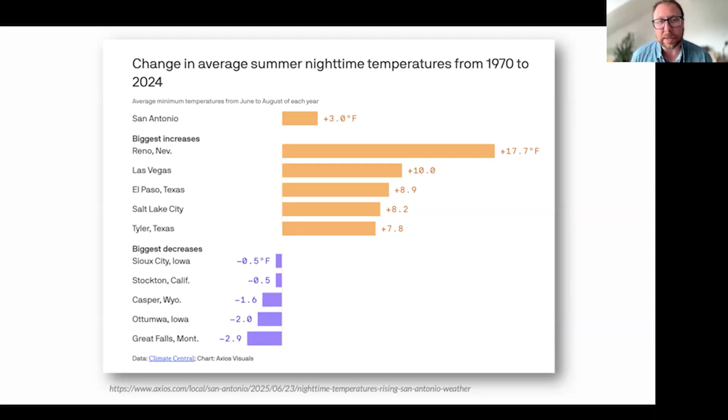We know that right now in much of the US, people are suffering under a heat dome. And we know that we as Passive House designers are charged with designing not only the most energy efficient buildings, but also buildings that are, for lack of a better term, resilient against these types of effects, these types of problems or challenges.

Now, for those of you working in the Passive House world, you know that Passive House prioritizes a small set of things. Passive House as a framework is much more focused, much more targeted than some of the more totalizing green building standards out there that might touch on water, energy, embodied materials and material toxicity. Passive House is much more focused—on operational energy performance, peak loads, and what we call thermal comfort.

And thermal comfort—we'll get into it in this talk. It's an interesting topic, so I could talk about it all day long. It might be boring for some folks, but I find it quite interesting: the experience of people in our buildings, and to my mind, quite important.

In the Passive House world, at least on the PHI side, the main way we quantify and evaluate summertime thermal comfort—talking about the difference between winter and summer—is by measuring what we call the frequency of overheating and the frequency of excessively high humidity. These are metrics we use to evaluate the building and ask, are we predicting that it's going to perform badly on these rough metrics?

Now, there's nothing wrong with these metrics per se. These are excellent high-level, first-order assessment metrics. If you're failing these, you can be pretty confident you're going to have a problem with your building. But what I want to argue is that these metrics are—maybe never were, but I think are no longer—sufficient and adequate for the types of buildings we're building.

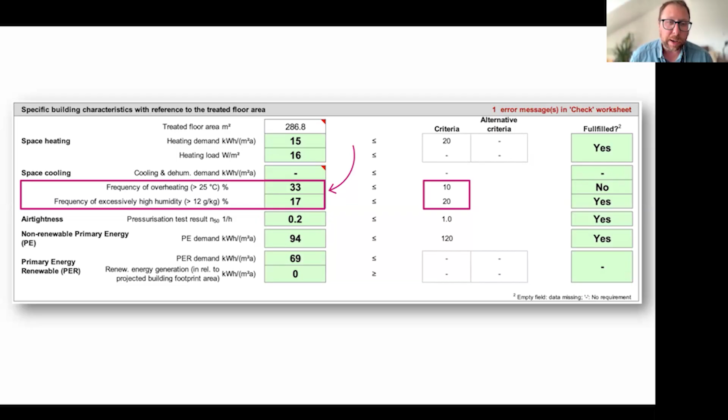So what I'm going to argue is that we need to supplement, not eliminate, but supplement—add some new types of modeling and assessment to these existing tools that we're already familiar with working as Passive House practitioners.

So my opinion, and this is just my opinion, feel free to disagree and argue with me—my opinion, after building umpteen bazillion Passive House models over 15 years now, is that the Passive House modeling tools don't push us, don't incentivize us as designers to be careful enough when it comes to overheating risk. Again, that's my opinion.

I believe we need to supplement—again, not replace, not eliminate, not get rid of—but supplement these existing Passive House modeling tools with other tools so that we can effectively design out the types of overheating risk that we are seeing in some Passive House projects.

And not to put too fine a point on it, but lest you think I'm making this up, we do hear regularly from many other practitioners, and many of our own early clients, that overheating in the Passive House buildings we design is and has been a problem. As a result of some of those early—I might even call them failures—back in 2009, we were designing buildings where we didn't quite understand all the nuances of this, and we definitely designed some buildings that overheated.

Those early failures have caused us to become much more conservative and much more careful when it comes to overheating risk. And I want to argue that you should be careful as well.

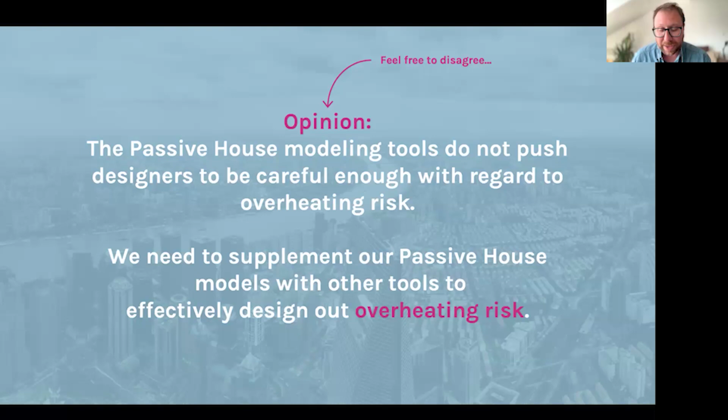So how do we do that? How will we do that? And what do I think we need to supplement? What do I think is missing from the existing passive house models that I think we should see in the newer generation of modeling tools that I'm recommending we add?

Well, the main culprits, the main issues present in the existing modeling tools that lead us to, I don't want to use the words right and wrong, but unhelpful results: number one, our passive house models are single zone. Especially when you get into really large buildings, buildings with heterogeneous use types, really tall buildings that are highly stratified and spread out.

These types of single zone models are just not adequate for capturing the localized overheating that happens in highly glazed rooms, north versus south side rooms, et cetera. So the single zone nature of our models is fundamentally a problem that we need to wrestle with.

I think also that while the monthly time step of the passive house models is perfectly adequate for energy performance assessment, and it's fast and easy-ish to execute for design phase assessments, and great for certification, that monthly time step is not quite adequate to capture the nuance of localized overheating events.

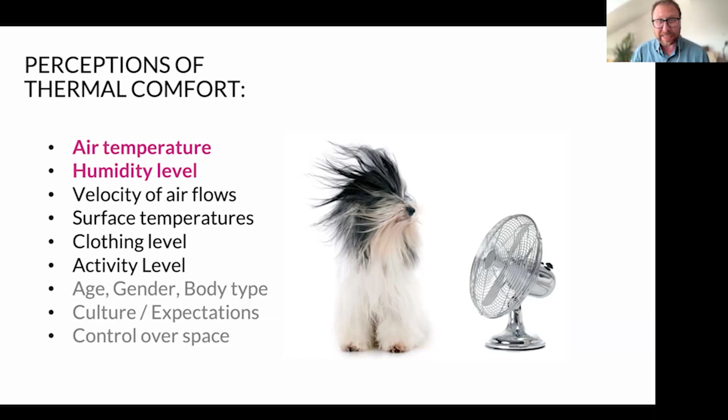So again, what we're talking about here is your and my perception, our feeling. But again, because we're engineers, we want to turn that feeling into a number.

So how do we do that? How do we turn your feelings into numbers that we can measure and optimize for?

There are two basic standards you want to refer to if you're interested in this type of modeling as a starting point. I'll talk about some other interesting new work coming out, but the two core fundamental documents you want in your library are the ISO 7730 and the ASHRAE standard 55. These are like mirror documents, basically saying the same thing, except one is in ASHRAE language and one is in ISO language. They outline the same procedures for evaluating, measuring, and quantifying the subjective thermal comfort experience of a human being within a space.

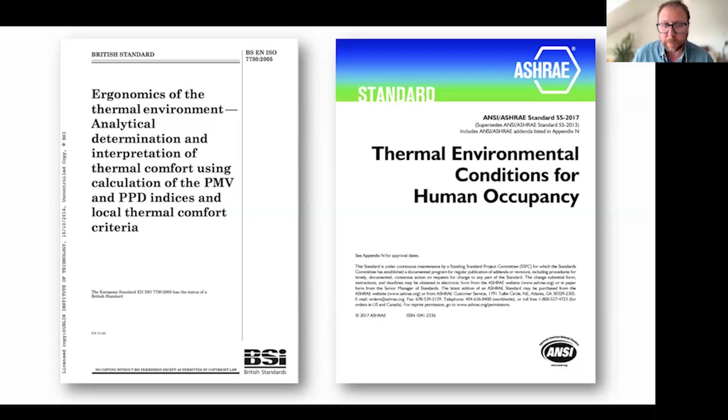Specifically, they outline a calculation methodology for determining what's termed in these documents the predicted mean vote, or PMV. This is a useful vocabulary term in thermal comfort modeling—again, a way of taking your and my feelings and expressing them as a series of numbers.

The way this index works is that the value 0 represents perfectly neutral, like one of those chambers people go into where everything is the same temperature and you have no feelings—I don't know what the term for those is. Negative values represent cold experiences, and positive values represent hot or warm experiences.

This PMV calculation takes into account most of the things we were just talking about: air temperature, relative humidity, airspeed, metabolic rate—that is your activity level—your clothing level, and your mean radiant temperature.

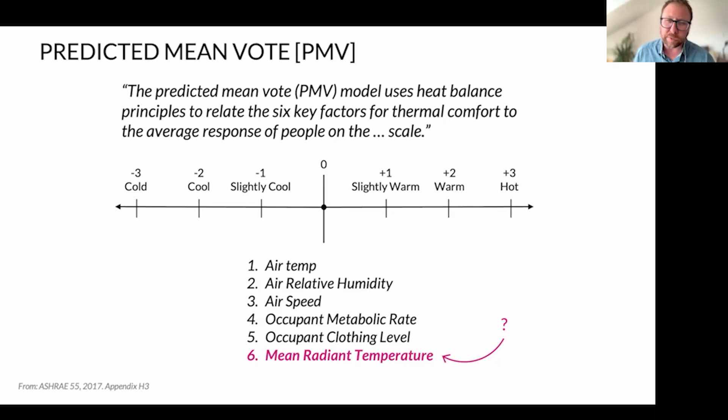Mean radiant temperature—that's a weird term. You'd be forgiven if you haven't heard it before. What is the mean radiant temperature, the temperature experience of the person within the space?

If you were to look around with infrared goggles, like those Predator goggles from the movie, and could see into the infrared spectrum, you'd see that every solid object around you—the floor, the wall, the chair, the window, the roof—is emitting infrared radiation.

The amount of infrared radiation emitted by these solid objects varies depending on the temperature, the heat content of that object. The hotter the object, the more infrared radiation is emitted.

Our bodies experience this radiation, though we can't see it—our eyeballs can't see into the infrared spectrum. We have sensors and cameras that can, but not our eyes. Still, our bodies experience that radiation within a space. So whether the surfaces around our bodies are warm or cold is one of the important factors driving our experience of thermal comfort.

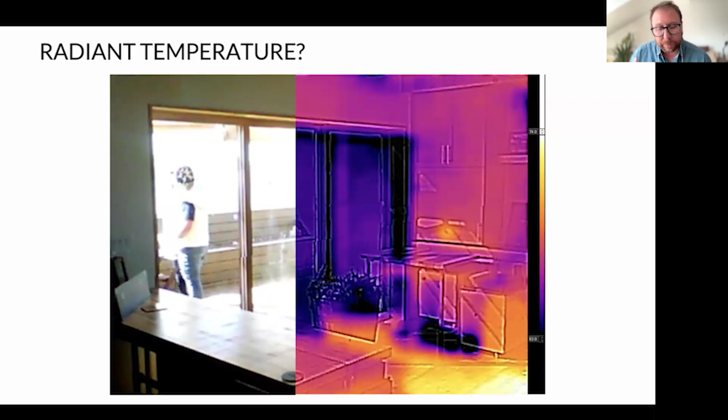This is one of the main evaluative criteria for providing thermal comfort in passive houses during winter. Historically, this has been a main focus area within the passive house community and framework—this radiant temperature asymmetry, particularly with regard to cold windows and very large cold glazing surfaces. A lot of the early research from the early 2000s coming out of Darmstadt focused on this problem of radiant temperature asymmetry.

So it's not only that the surfaces around your body are cool, but that they're cool on one side of your body and warm on another—or cool on one side of the space and warm on another. This asymmetry leads to negative perceptual effects, not only directly on the human being, but also because of the inevitable temperature stratification within the space. You can get cold air puddling, a cold toes effect, and other negative perceptual effects when you have this type of asymmetry.

Historically, one of the ways that the passive house standard has said we combat this passively is by using badass windows. If we use badass windows, that increases the temperature on the interior face of the window, therefore mitigating or reducing the asymmetry, the difference in temperature from one side of the body to the other. That can help improve thermal comfort within buildings and decreases temperature stratification. So that's an excellent thermal comfort improvement we can implement for the wintertime.

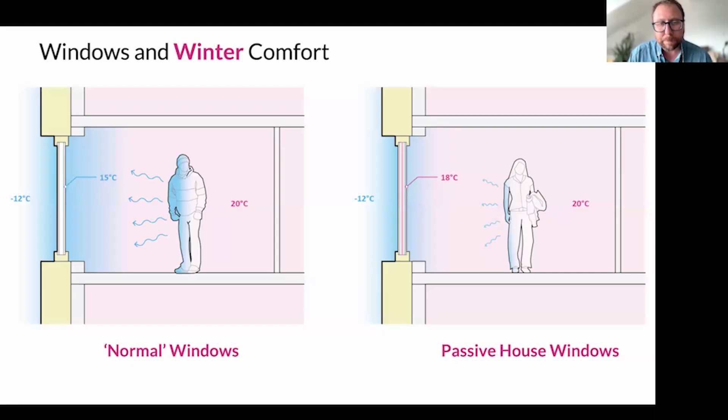Many years ago, we were looking at this and thinking, that's great, that's really useful. But then we were presented with a series of cases, conditions, whatever word you want to use, that didn't quite match the scenario I just described. What I described kind of makes sense if you're in, say, a hotel with a big glass wall, but you've only got one wall and the rest of the space is kind of opaque.

But what happens if you actually have glass around a corner? What happens if you have glass on two sides of your body? What happens if you have really tall glazing? We were working on projects that presented these interesting, and I don't want to call them non-standard, but let's say from a Passive House perspective, non-standard conditions. We were looking for different ways to assess and model the thermal comfort impacts of these kinds of unique or non-standard conditions.

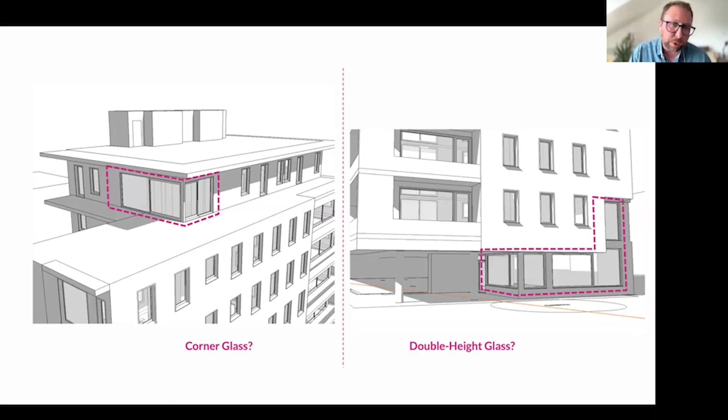We felt like that basic Passive House technique of just reducing straight asymmetry wasn't quite sufficient for capturing the nuance of the actual buildings we were building. So again, this is, I don't know, 5 or 6 years ago, 7 years ago.

What we settled on at the time, one of our early attempts to add nuance to our modeling, was to say, okay, what if we used some of these new computer systems and software tools available, which can harness the power of modern computers to calculate really, really fast. One of the things the Passive House folks working in 2001 didn't have was an amazing Silicon M1 or M4 Apple computer that can do trillions of these calculations very fast. But we do have those nowadays.

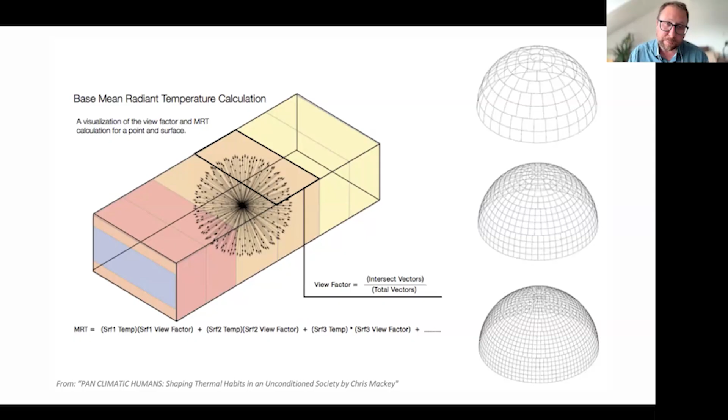So instead of just calculating a single asymmetry value, we can actually take into account the entire space around the occupant. We can calculate the temperature asymmetry not as a single value, but as an entire mapping of values across a space.

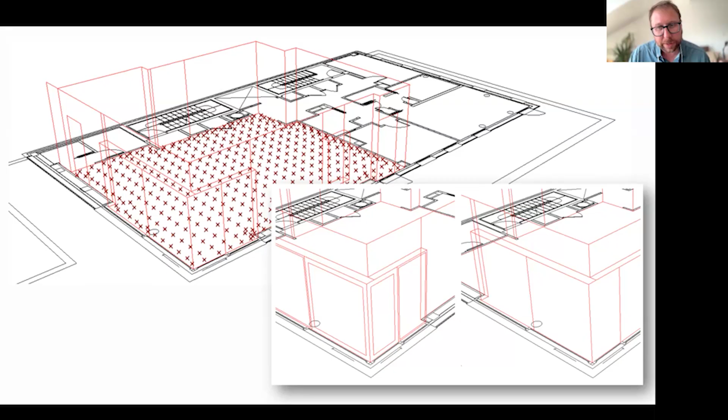What you see here is one of our early attempts to take that corner glazing scenario and model not a single temperature asymmetry value, but a range, a mapping of temperature asymmetry values across an entire analysis grid. We built up a whole toolkit here to allow us to do that kind of modeling.

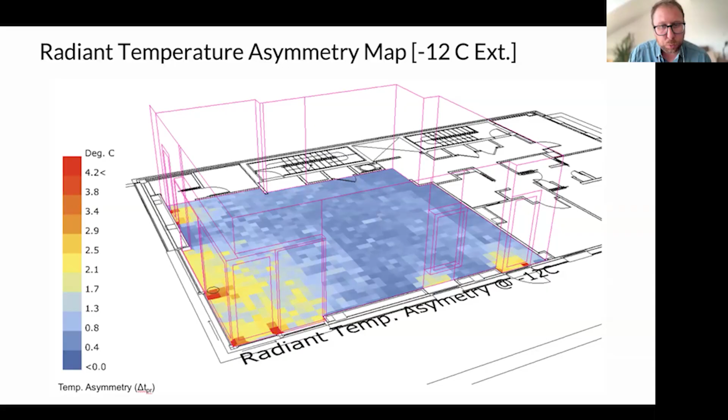These types of modeling tools are not replacing our Passive House tools, but they are supplementing them, adding more nuance, more depth, more data and information to the modeling and design phase. This really helps us design better, more comfortable buildings. We can identify hotspots for thermal comfort issues and attack those through design measures. This was an early effort to supplement Passive House tools with more nuanced tooling and modeling assessment methods.

So that's pretty interesting when it comes to the heating side, right? That's important. But as I've said, and as I'll argue throughout this presentation, the cooling side is just as, if not more, important. So in addition to that wintertime scenario, we need a method of assessing summertime. One nice thing ASHRAE 55 has that ISO 7730 does not is a method for calculating the comfort impact of solar gain on occupants.

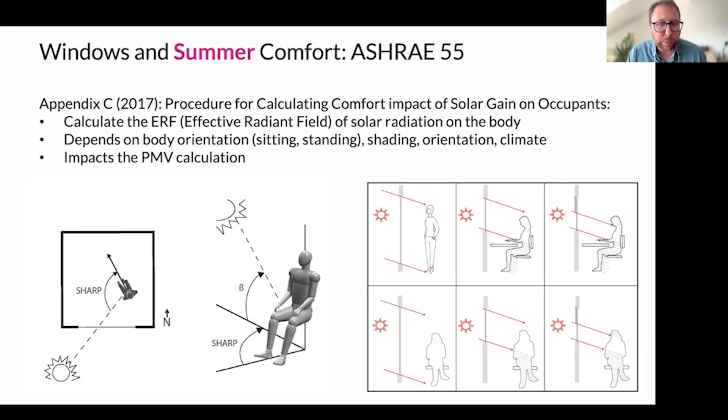So this is a way of saying, not only are we going to take the ambient higher temperatures of summer into account, but we actually want to calculate the effect of solar radiation directly on a person's body when they're inside a space. We can take the methodology we implemented in the last example and add in this new layer where we account for the summertime effect of solar radiation directly on a person's skin.

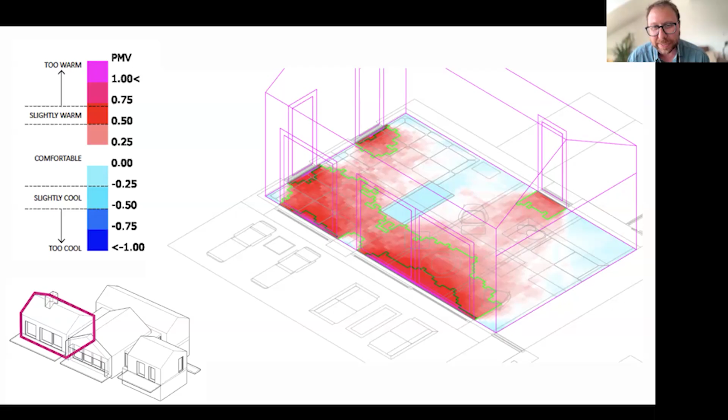Now what we can see is if we apply that to a different building - a small wing of a single family home out on Long Island - we can again see a comfort mapping, a comfort gradient throughout the entire space, but this time really focused on those overheating risk areas. It's not really any surprise that the big south-facing unshaded expanse of glazing is going to be the area where you feel the most discomfort in that space. Nothing revolutionary there, but at least we can put some numbers to it.

We can quantify it, and once we've quantified it this way, we can start to go through the design exercise of: what if I do this? Does it become better or worse? What if I do that? Does it become better or worse? Those design exercises become informed by these types of thermal comfort simulations and mapping efforts.

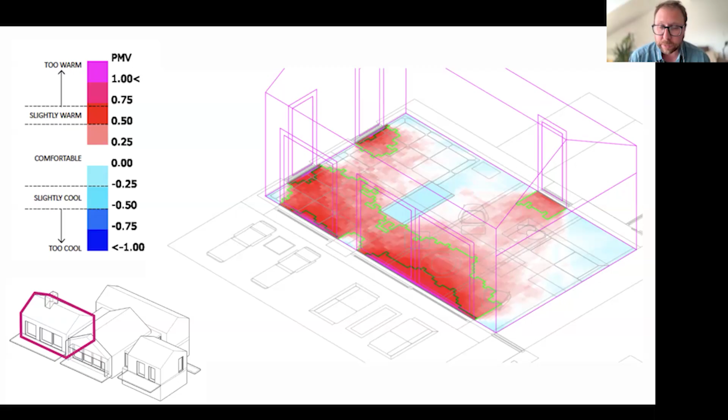So that was interesting - that was many years ago. Those point-in-time assessments were useful. They were helpful. We felt like they were adding something useful to our overall modeling within our projects. So those point-in-time assessments were good.

But of course we were curious and wanted to know if we could go a little further. Once we could get a handle on those point-in-time simulations - to be clear, those are looking at a single moment in time - how do we begin to play that out over time? What happens when we start to look at maybe a week-long sequence of how our building performs?

So this is an example of trying, not entirely successfully, but trying to apply some of those ideas to an example project. In this case, this was a community center in upstate New York. I don't believe this was ever built, but this was around 2018. This was a study, and in this case we were of course using those passive house modeling tools. As I said, those are critical, super important, super useful.

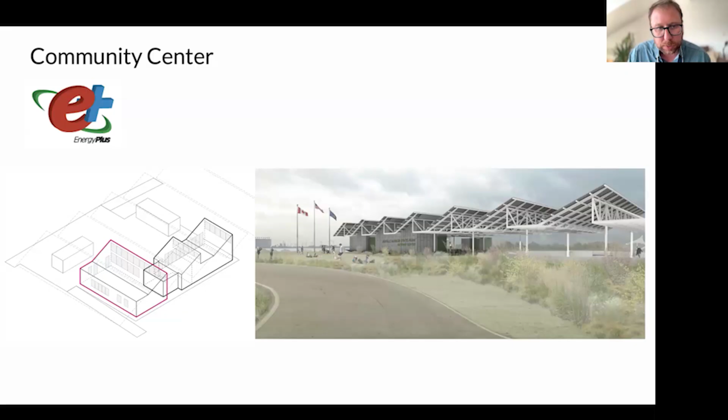But we were supplementing them with additional dynamic hourly energy modeling using the EnergyPlus platform. The results I'll show here were focused on just one block. With these other types of tools, we have to zone the building into blocks rather than doing a big single zone model like we would in the Passive House world. The results I'll show here are for that highlighted volume - just a single zone in this community center office in upstate New York.

What we chose to do for this one will kind of lead into some of the other work I'll show in a minute. EnergyPlus is a very powerful tool - if you're not familiar, it's an hourly, sub-hourly modeling tool, an engine that allows you to do really sophisticated performance assessment models of buildings. Probably one of the biggest challenges of EnergyPlus is that when you run it, you just get this absolute fire hose of data out the other end. It can be like a full-time job just to wrangle all the data that comes out, clean it, organize it, and synthesize it to make sense of it.

So for this project, what we wanted to do was try and limit the scope a little bit. We said we're not trying to do an annual energy assessment using this tool - what we really want to do is shrink the window of assessment down to a single week. So we identified the worst week in this climate.

On this graph here, what you're seeing is one week of data, going from Saturday on the left to Saturday on the right. You can see in the black line there the outdoor temperature being plotted, going up and down, up and down. Very cold over this week.

And then what you're seeing in red there are two different versions of the building that we were assessing: a code minimum or standard baseline version, and an improved, optimized passive house version. What you can see is the large reduction in hourly heating energy demand, kilowatt hours per hour, when we go from code minimum down to the passive house version.

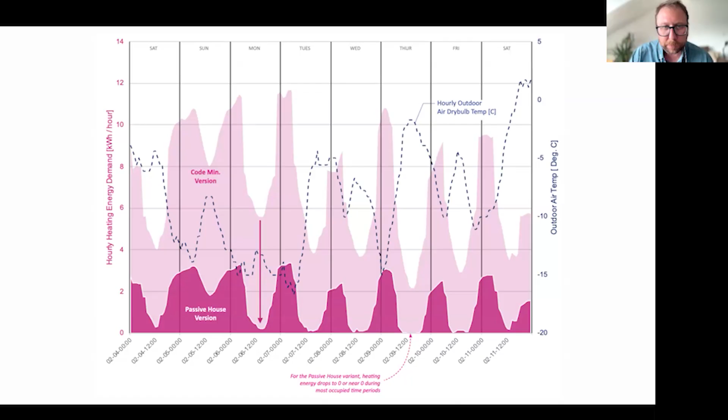Now, the important thing to note here is that we're not looking at thermal comfort right now, or any of those human perceptual effects. What we're looking at in this case is heating energy demand, which is why I call this a kind of rough try. This was five or six years ago. We'll show some newer versions that I think are a bit more successful than this.

This is just another way of looking at the same data we were just looking at, and it shows us something a little bit different. What we're plotting here are those hourly energy demand values, kilowatt hours per hour, showing the code minimum version and the passive house version.

And we're showing those hourly values, not over time like in the last one, which was chronological. Here, what we're showing is those values plotted as a function of outdoor air temperature - warm temperatures on the right, cold temperatures on the left.

You would expect that as the temperature gets colder, those heating energy demand values would go up, and that is what we see. In both the passive house version and the code minimum version, the heating energy demand values go up, but what we see is a marked difference in the slope, or rate of change, between the two. The rate of change of the passive house version is much flatter, much lower than the code minimum version.

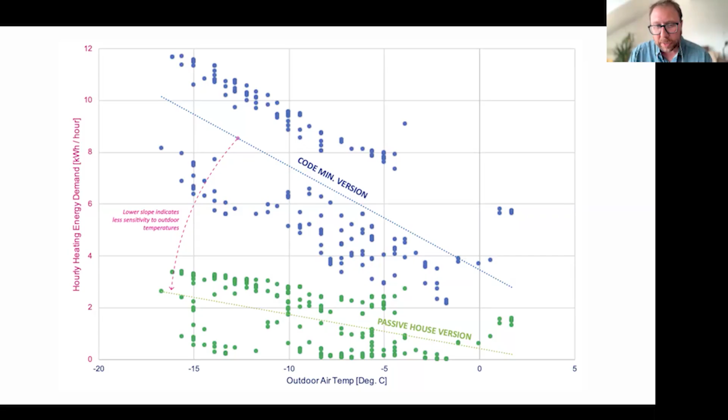It's an indication that the building you're designing is going to be much more resistant, more insulated for lack of a better word, from the outdoor environment. The lower that slope, the more independent your building is functioning from the outdoor environment. By contrast, the code minimum version, where it's much steeper, shows a much more sensitive building, one that's much more subject to outdoor conditions. It's just another way to look at the same data that teaches us something about how well we're doing with the design - is it on track, is it heading the right direction?

But of course, I've already hinted at this: is energy demand really the right value to measure in these types of assessments? No, I don't think so. And that kind of brought us to a few years ago.

And then what I want to show next is going to be a series of experiments utilizing the framework outlined by the new Phius REVIVE standard, moving away from energy demand and more directly towards some interesting thermal comfort metrics.

If you're not familiar with the Phius REVIVE standards, Phius REVIVE 2024 was released in 2024, and it's got all sorts of really interesting tidbits in there. I saw Al was in the audience, so shout out to Al Mitchell and everybody at Phius for all their awesome work on this. I'm a big fan. I think it's super interesting, and there's a lot of really great parts in here. There's also a lot of parts that I'm still very confused about. So we're learning, we're trying.

For the last year, we have been really trying hard to wrap our heads around the resilience assessment methods outlined in this standard, and test those methods out on a couple of real projects to make sure we're understanding the nuance and how these things play out. This standard is for retrofits, and it has some really valuable and useful frameworks and tools for doing this type of resilience assessment. It has rules and protocols around how to set up your building, the model, loads, schedules, and so on.

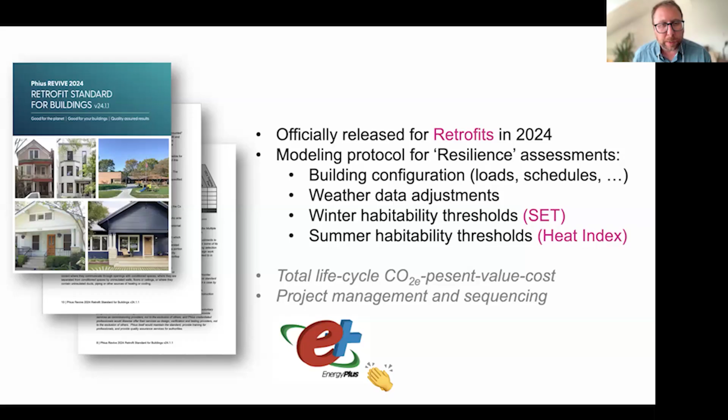There's all sorts of other cool stuff in there around total life cycle CO2, present value cost, project management, sequencing. I'll let you read through this at your leisure. It uses Energy Plus as its calculation methodology. Overall, I think it's a super interesting framework. This is not a talk about the Revive standard, though, but I just wanted to shout it out and note that there are some interesting tidbits here that I wanted to pull out.

Now, just to talk through some of the bits here that are going to be relevant to the results I'll show in the next examples: the framework says that we should model a 7-day power outage. This is an interesting nuance or difference from the way we were looking at this previously, where we were saying, model the heating energy demand. Here what they're saying is, no, turn the power off. What happens if there is no power and there's a terrible winter storm or a terrible summer heat wave with no power, and then measure the thermal comfort effect, the habitability of the occupants in your building during that scenario?

There's a couple other things here. One interesting one, and maybe Al, I don't want to put you on the spot, but maybe he can help us understand this. I believe the rule is that if you have an ERV or an HRV, you're supposed to run it at 5 CFM per person off battery power. Now, that's way beyond my knowledge. I don't know anything about electricity and that sort of equipment configuration. I don't know if that's actually possible. If anybody knows how to do that, I'd be super curious.

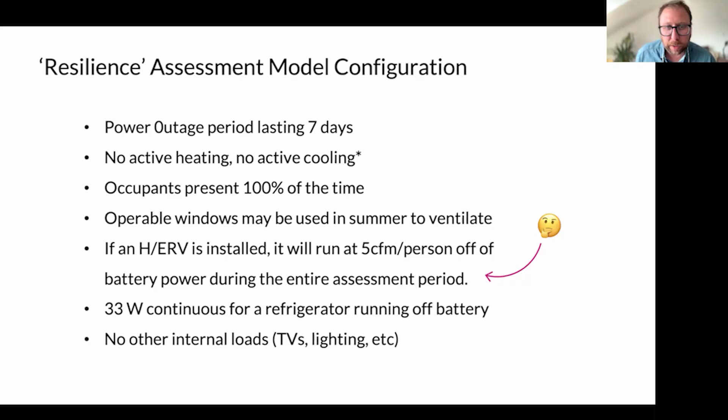Batteries are not something I really have any experience with, so that's a really interesting one. And that is how we set up all the models that I'll show you in the next sequence. But I'd be curious to know whether that's actually feasible or realistic for projects nowadays, if they really have ERVs running off of batteries. I would also note, and this is maybe one of the places where I am a little confused by this protocol, that it appears to say in the standard that if the building has a battery system capable of running the heat pumps for active cooling, then they can be used to provide active cooling.

Again, that's kind of beyond my pay grade. I'm not aware of how heat pumps can be run off of batteries. I was under the impression that the startup voltage on those heat pumps was too high to run off batteries, but maybe that's no longer true. Again, that is way outside my sphere of expertise.

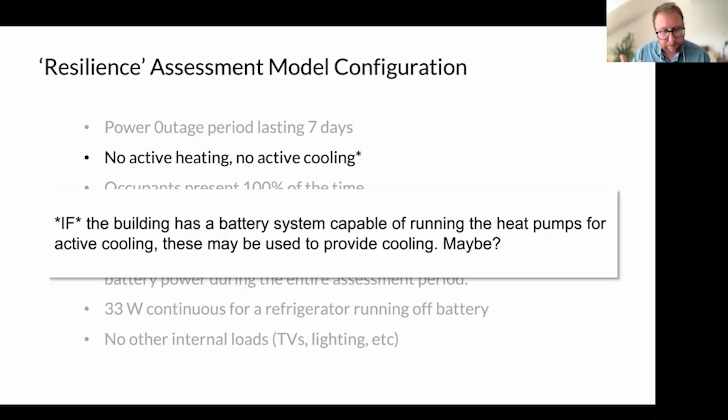So for all the examples that we're going to be showing, we are running the ERV, but we are not running the cooling heat pumps. So for the cases that I'll show in the next little bit.

Just briefly, one of the interesting things was that there's a weather data adjustment protocol here, which basically allows us to take TMY data, typical meteorological year data, which is a sort of averaged or smoothed out weather data for your location, and turn it into stress case weather. So you take your summertime week and turn it into a heat wave, as we show here. This is plotting the results of that weather morphing or adjustment over time. You can see the original TMY3 data on the bottom, and the adjusted temperature used for simulations on top.

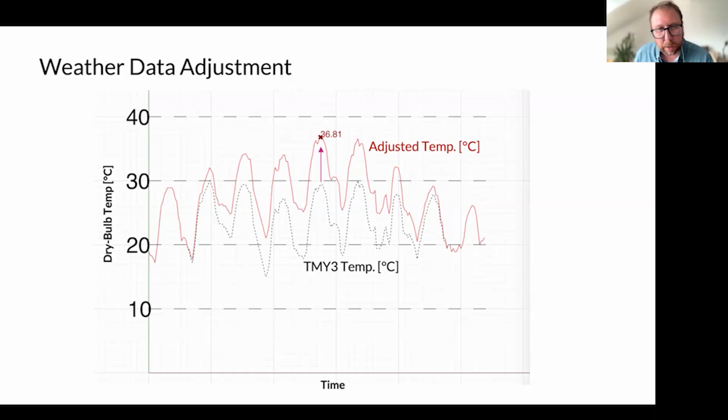Again, we're looking at just a week of simulation, not the whole year. We're zooming in on a single week in the winter and a single week in the summer, and we're going to use this adjusted temperature data for our simulations. So this protocol is in there, and I think it's a valuable piece of the puzzle here.

But the most valuable things, to my mind, are that we have these thresholds to measure our models against and say, are we meeting these targets, yes or no? So what are the targets? In wintertime, over the entire 7-day period, we should have less than 216 SET hours, standard effective temperature hours, below 54 degrees Fahrenheit. It's a little confusing, we'll talk about that.

And then in summer, we have to have 0 hours per year, or per assessment period, with a heat index above 102 degrees Fahrenheit. There are other rules, but those are kind of the main ones relevant to what we're looking at here.

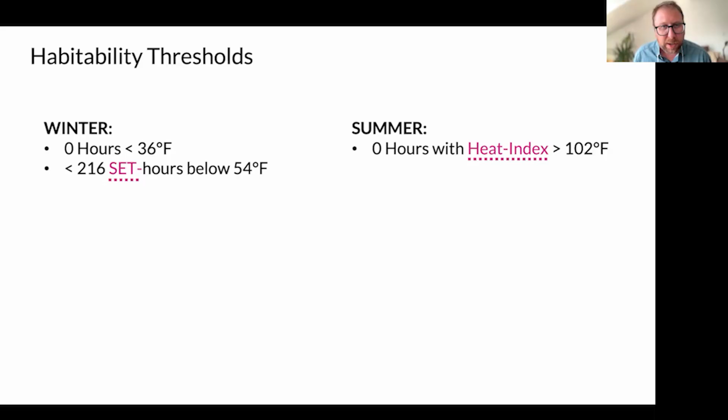So we have these threshold levels. We say we want to go below in wintertime or above in summertime. This is some weird vocabulary there: heat index and standard effective temperature. Standard effective temperature, let's just call it a feels-like temperature, more or less.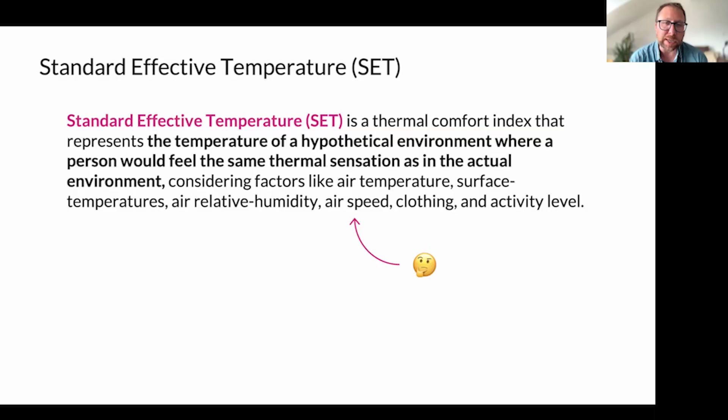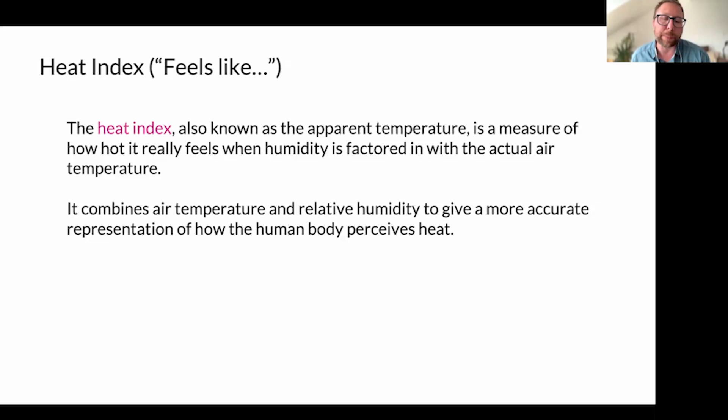It considers things like air temperature and surface temperature, importantly, relative humidity, airspeed, clothing, activity level. All of those things get taken into account when we calculate the standard effective temperature. The heat index is another feels-like temperature, but a little bit more limited, takes into account humidity and temperature. So a couple different ways of assessing temperature. We're not just looking at dry bulb air temperature, but broadly, we're looking at feels-like temperatures for winter and feels-like temperatures for summer.

So let's look at a couple examples. What we were curious about was what happens if we apply some of these methods and frameworks to some of our projects. Now, we're not certifying these projects to the Revive standard. These are actually new construction, so they're not retrofits, so they're not eligible anyway. But I like this method of assessment, or I was curious about it, and so we wanted to apply it and see what the results were.

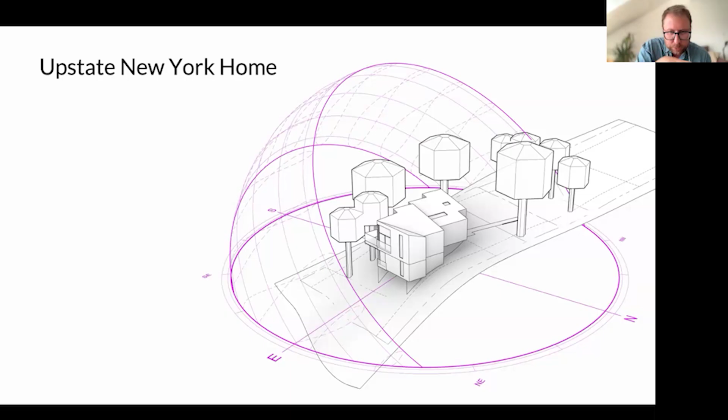So this is a small home, new construction, passive house in upstate New York, up in the Finger Lakes region. You see it's on a steep site here, wooded site, and it's a small house that kind of works its way down the hill a little bit. Not optimum surface to volume ratio, but passive housey, and certainly within the bounds of the types of passive house buildings that we do a lot of.

Predominantly south facing. You can see here, well, it's south and east facing. It's on the west side of a lake, and so there's a lot of glass on the south and east side, sort of pointing towards the lake there. With the volume of glazing, whenever we see this much glazing on a building, your spidey sense should kick off and you should start to think, are we sure that it's going to be okay in the summertime?

Right now, today, when it's 102 degrees in this place, is it okay in this building? Or are we designing something and optimizing for wintertime and not really paying enough attention to the summertime scenario there?

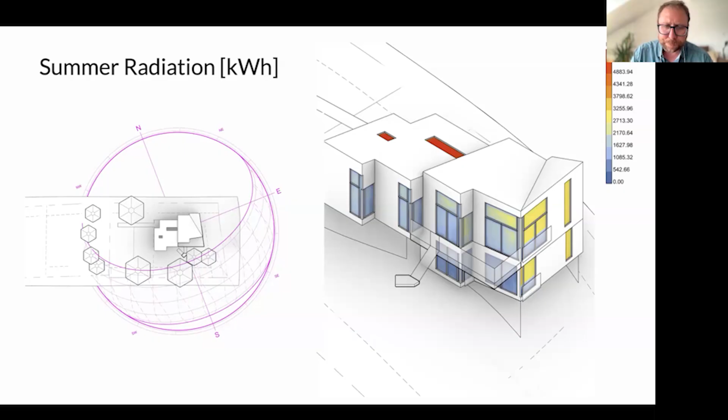One of the ways we've done that historically is by calculating seasonal radiation values. On the right-hand side, you can see radiation mapping across the windows, looking at seasonal radiation in terms of kilowatt hours. You can see those skylights showing up brightly, and the other windows, to a greater or lesser extent, seeing a pretty significant amount of radiation in the space.

But again, we were curious what would happen if we applied these resilience techniques or modeling assessment methods from that Revive standard to this particular project.

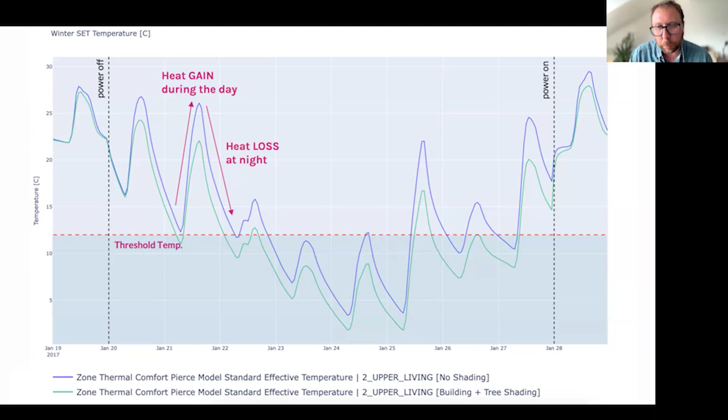So all of these different dynamics are playing out and affecting the performance of the building. We don't need to dwell on anything here, but what I want to show is that this gives us a window into how our building is performing in a different way than annual energy modeling or energy-focused modeling really gives us. This is a whole different perspective on what it's like to be in this building, and what the performance of this building is like.

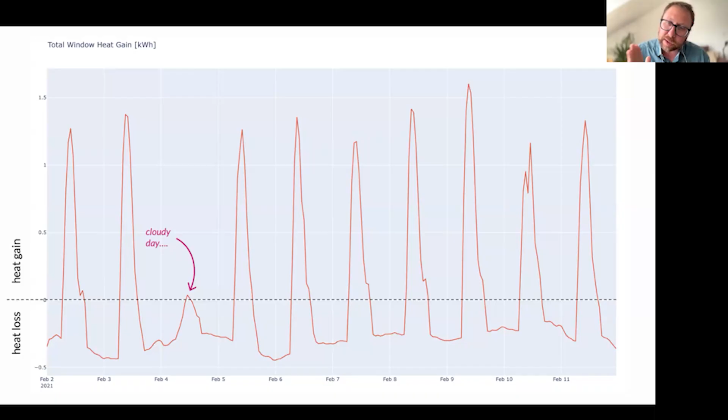Because of the nature of the tools, we can dive into any aspect of the performance we're interested in. In this case, we're looking at the total window heat gain, and you can see that cloudy day on the third day there. You can also notice how those heat gain values are skewed to the morning because of the orientation of the building - we're getting most of our heat gain in the morning.

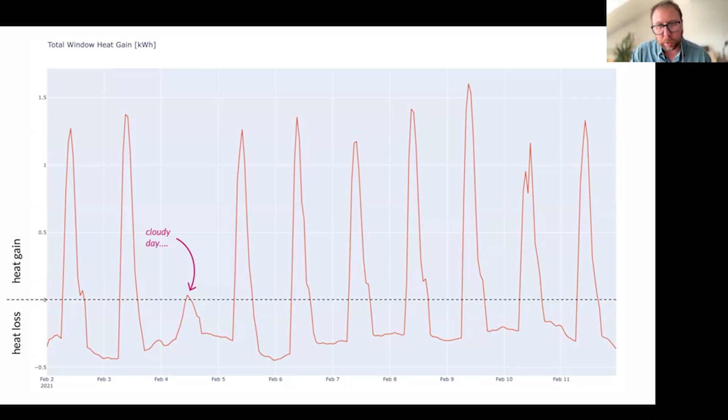So if we're designing shading strategies, this is the kind of data that you want to know when you're really dialing in effective shading strategies for your building.

Now, when we flip the equation and look not at the wintertime but rather at the summertime period, we see a different picture. We do a similar thing where we identify a peak week, turn the power off, let the building run for 7 days, then turn the power back on. During that period, we have to make sure our building never crosses into that danger threshold area. So we've got a couple of different thresholds that we want to stay out of.

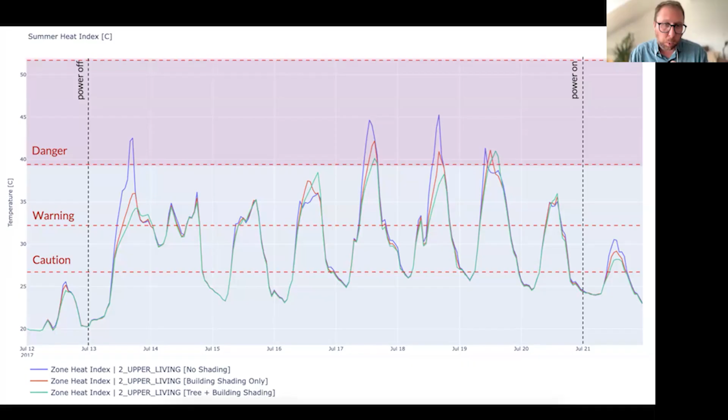One of the questions on this particular project was the level of tree clearing that was going to happen. Given the nature of the site and the existing tree canopy, we had to figure out what needed to be cleared to make room for the building, and what was going to be kept.

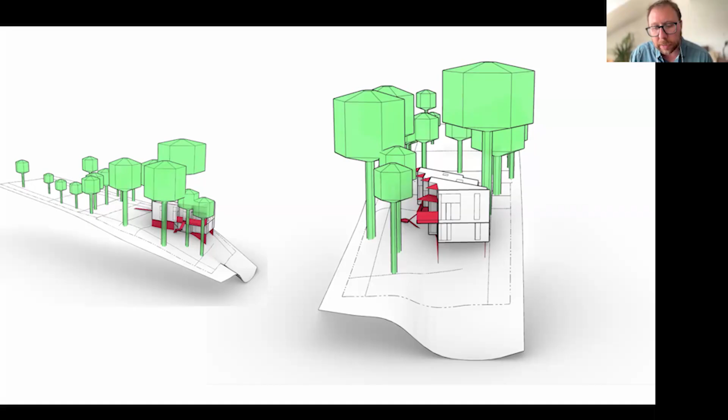What we could clearly see is that by keeping those green highlighted trees, in addition to the red shading elements we're highlighting in this detail, we're able to drop the temperatures within the space pretty significantly—almost 8 degrees Celsius of reduction in those peaks.

At least in terms of this modeling, we were able to move out of that danger period down into the warning period. It's still hot, still a heat wave, but we're definitely able to positively improve the performance of the building and make the case to the team that you really want to keep more of that existing tree cover than you thought you did originally. You want to hang on to that because it really benefits your overall total performance.

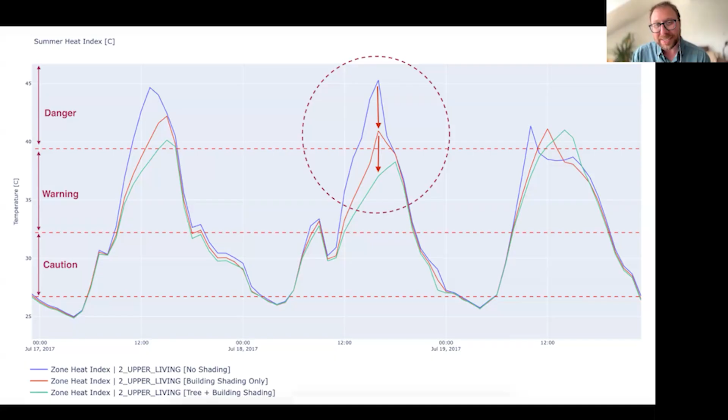So again, this is a way of seeing the performance of the building. It's very different from just looking at annual energy. Annual energy is important—we're not saying throw that away—what I'm saying is supplement it with these more nuanced and detailed types of models.

The last example I'll show is another project where we were trying out these techniques: a townhouse down in New York City. Very different building, a stratified building with many vertical zones. This one is again east-facing, so challenging from an exposure perspective.

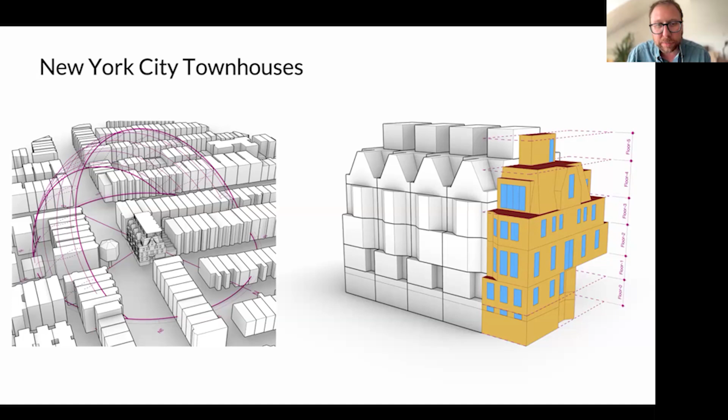But this one, by virtue of being a townhouse—so it's buffered on both sides—and being in New York City, which is a much warmer climate than upstate New York, shows basically no problem at all when it comes to winter performance. You're looking at the wintertime SET temperature here. Notice the threshold temp is way down at the bottom of the graph—we never even get near it.

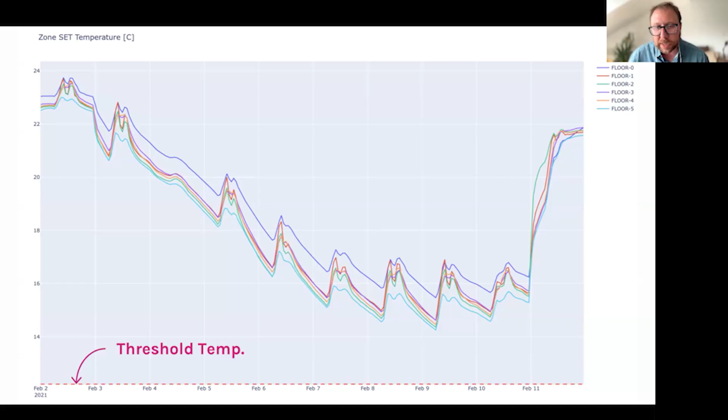So when it comes to this building, and this gets borne out in our experience with these townhouses in New York City, there's almost no challenge at all when it comes to wintertime performance. If you implement all of those passive house strategies—lots of insulation, good air tightness, and an ERV—you're going to be fine in the wintertime.

However, if we flip the script and look at summertime performance, those same things which helped us in the wintertime start to penalize us in the summertime—since it's a warmer, denser, more tightly packed climate. So what we're seeing here is the summertime power outage period, and notice that all of our values climb up into that danger period quite significantly. In this case, we zoned the building into multiple zones, so the different lines represent the different floors of the building.

So, you know, the cellar and the first floor and the second floor - you can see the different floors independently. And obviously each floor is going to perform a little differently based on the amount of glazing and the internal temperature stratification and what have you.

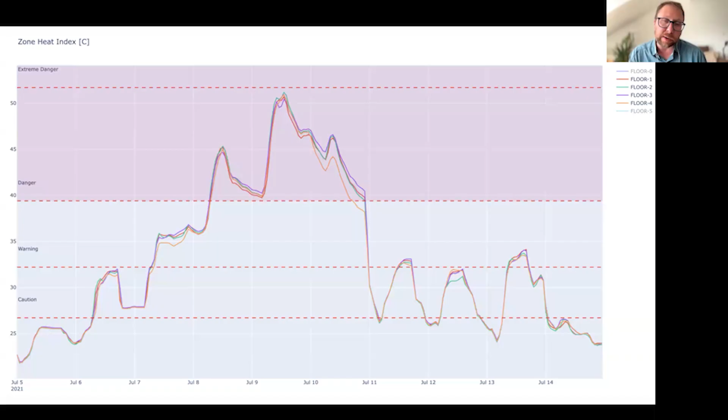This was really interesting, and this was definitely an important flag for the design team to say, whoa, we have not focused enough on the summertime performance here. We really need to dive in and figure out how we can improve that. We kind of appear to have the wintertime thing sorted out - that seems to be working really well - but clearly these methods are indicating we have a problem in the summertime. So I think from these results, it appears the design up to that point had been too focused on meeting heating targets and not focused enough on meeting cooling targets.

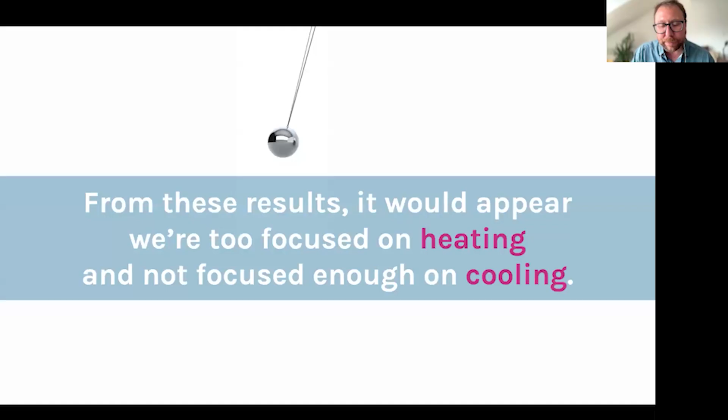Again, I am not arguing that we should ignore the heating targets. What I'm arguing is a both and. We should meet all those heating targets, and we need to focus as much effort and attention on the cooling side as well.

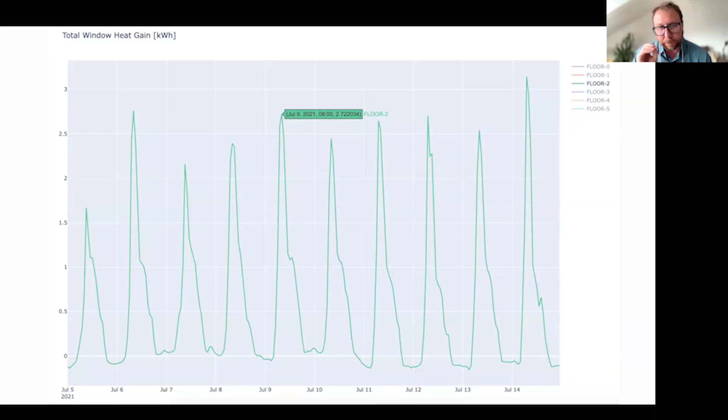Because of the nature of the tooling here, we can really dive into a super fine level of detail. We can say, oh look, those peaks are happening at 8, 9 o'clock in the morning, depending on the floor. So as we go back and work through the design phase we say, okay, we need to design better shading. Well, what does better shading look like for this building? Clearly it's going to be shading that attacks that early morning sunlight, given this particular building and orientation. This kind of data helps focus our efforts as designers.

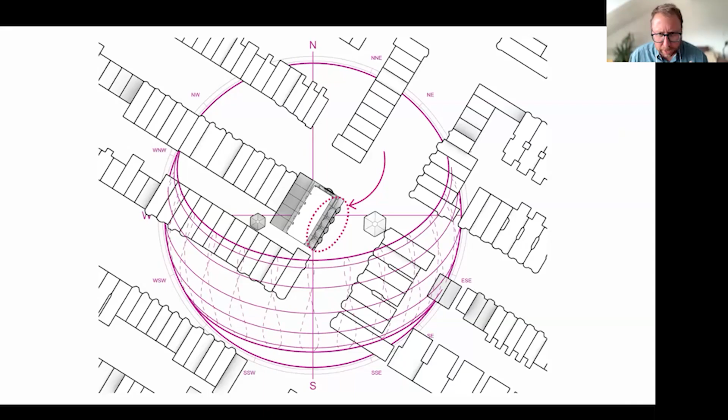And yeah, of course, now that you say it, if you looked at it in plan, you would have said you need better shading on that southeast face. But again, these methods are just ways of helping us see things that already exist in our building, bringing them to the fore. They're showing them to us in a new way where they're harder to ignore, harder to mistake, and then we can attack them and design them to work better.

So my recommendation is, at a minimum, supplement your passive house models with a detailed hourly simulation to assess overheating performance during summer. I really like this idea of doing a summer power outage assessment - I think that's a strong idea that will help us design better buildings. If you have the capacity, do a winter one as well, though I think the winter one is maybe a little less necessary than the summer one, although I'm open to being wrong about that.